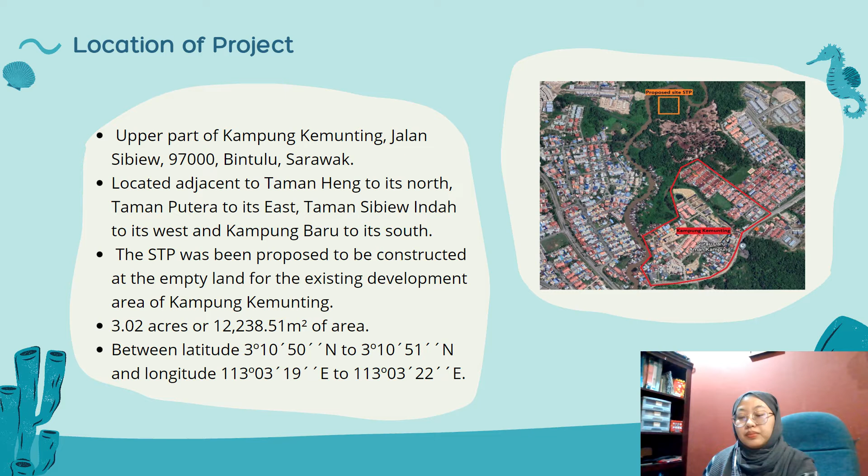The sewage treatment plant has been proposed to be constructed at the empty land of the existing development area of Kampung Kemunting. The STP will occupy 3.02 acres and 12,238.51 square meters of area. The project objectives are listed as shown.

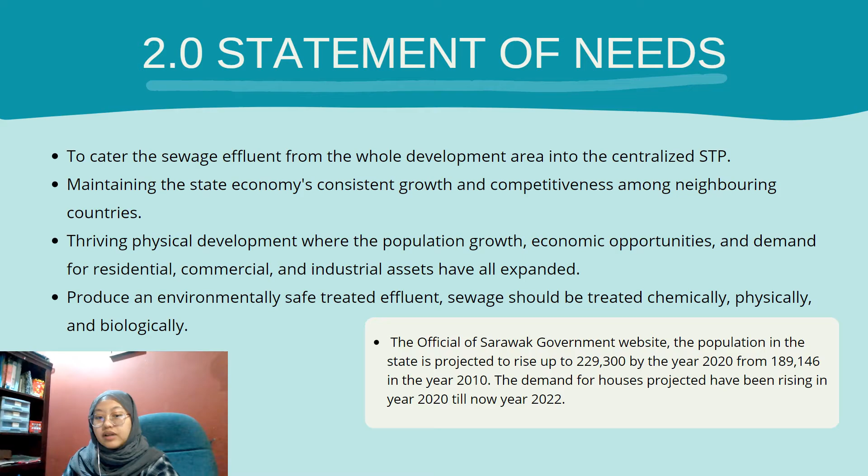As for the statement of need, Bintulu is experiencing rapid urbanization, which requires catering the sewage inflow from the whole development area into a centralized STP. Secondly, maintaining the state economy's consistent growth and competitiveness among neighboring countries. Thirdly, thriving physical development, where population growth, economic prosperity, and demand for residential, commercial, and industrial assets have all expanded. And the official Sarawak government website shows that the population of the state is projected to rise and keep expanding.

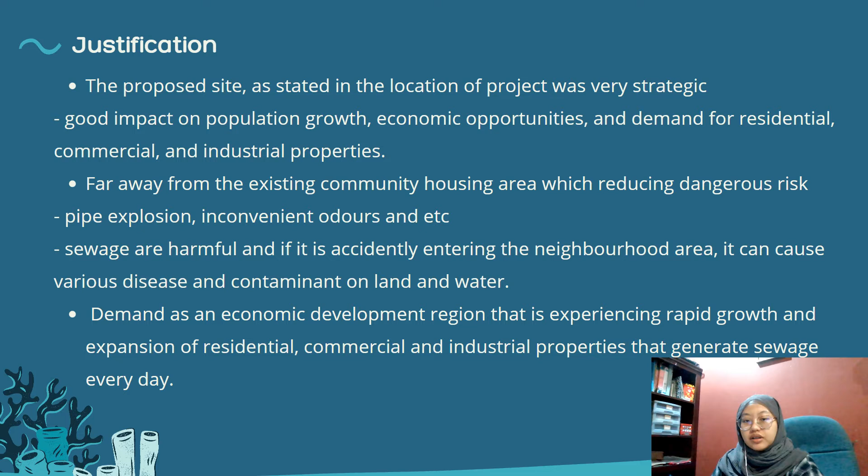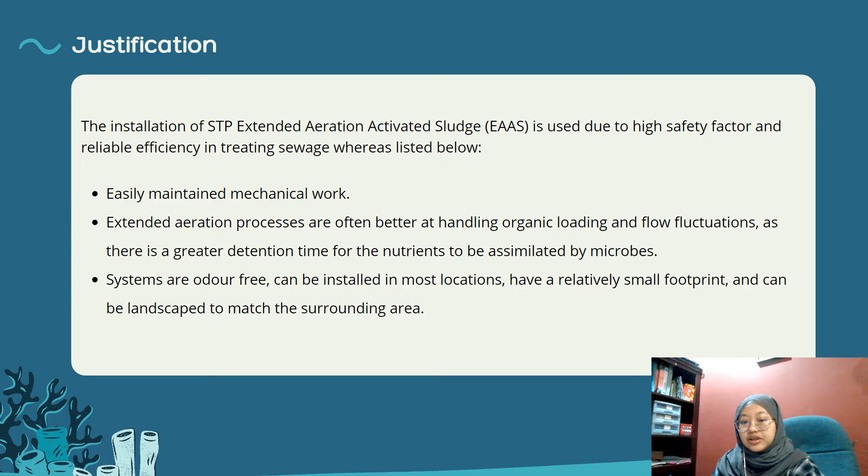Project justification. The proposed site location of the project is very strategic, with good impact on population growth, economic opportunity, and demand for residential, commercial, and industrial property. Secondly, reducing dangerous risks, for example, pipe explosion, odors, and etc. And lastly, demand as an economic development region every day. The proposed project will be using the technology of extended aeration activated sludge, the EAAS system, due to its high safety factor, reliability, and efficiency in treating sewage, as shown.

Assalamualaikum, my name is Afiq bin Amin. I will present site evaluation and project option. For project site, we choose Kampung Kemunting Development Bintulu Sarawak with population equivalent of 20,000 PE. The proposed site for the sewage treatment plant, STP, is determined to be suitable in location and topography. The location is near the river for easier discharge but far from the development area. Topography for the STP site is a bit hilly but solved through earthwork, cut and fill, to have suitable topography for better water flow.

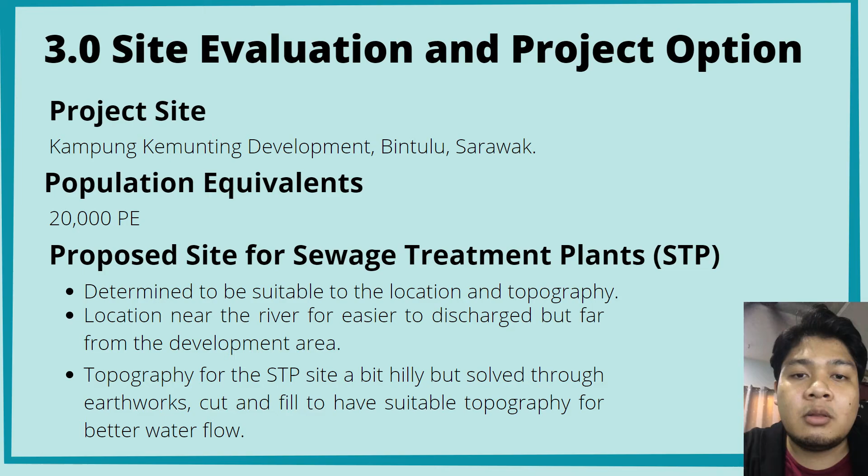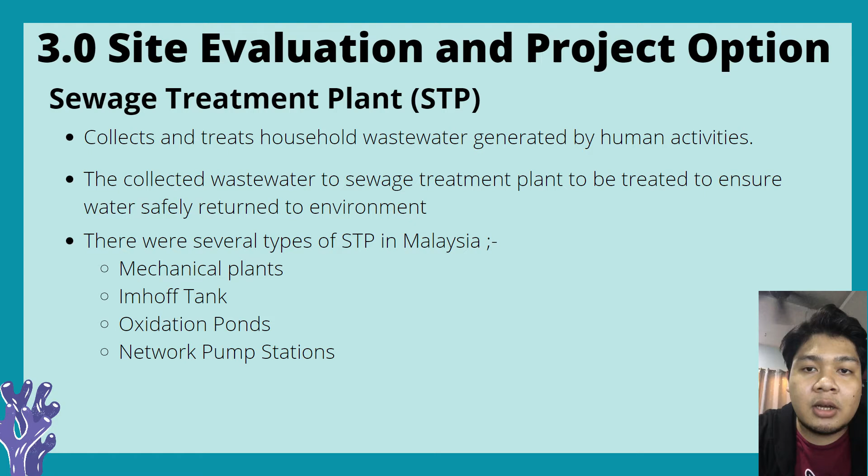A sewage treatment plant, STP, collects and treats household wastewater generated by human activities. The collected wastewater goes to the sewage treatment plant to be treated to ensure water is safely returned to the environment. There are several types of STP in Malaysia: mechanical plants, Imhoff tank, oxidation pond, and network pump station. In Malaysia, almost 38% of STPs are mechanical plants. These include extended aeration, oxidation ditch, rotating biological contactors, and sequencing batch reactors.

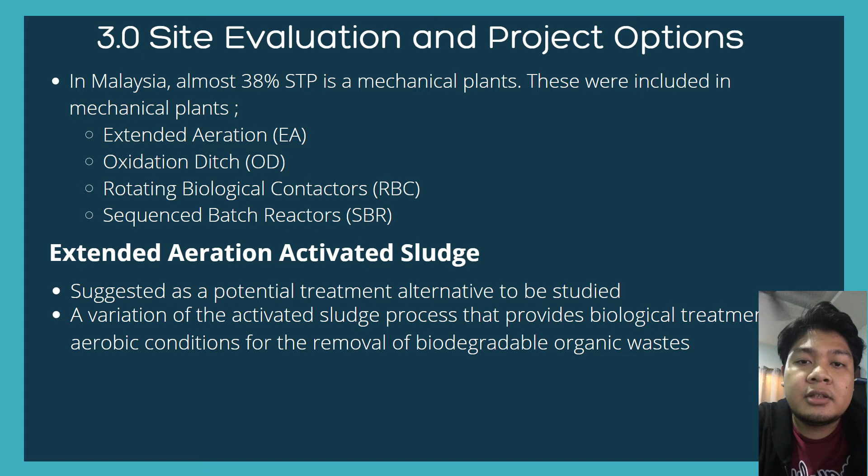We choose extended aeration activated sludge, suggested as a potential treatment alternative to be studied. It is a version of the activated sludge process that provides biological treatment under aerobic conditions for the removal of biodegradable organic waste. For project option, the chosen project site is at Kampung Kemunting Bintulu Sarawak with 20,000 PE. The proposed STP for this development area is extended aeration activated sludge, EAAS, more efficient in terms of sewage treatment efficacy, in terms of government standards, smaller footprint, and easier to operate.

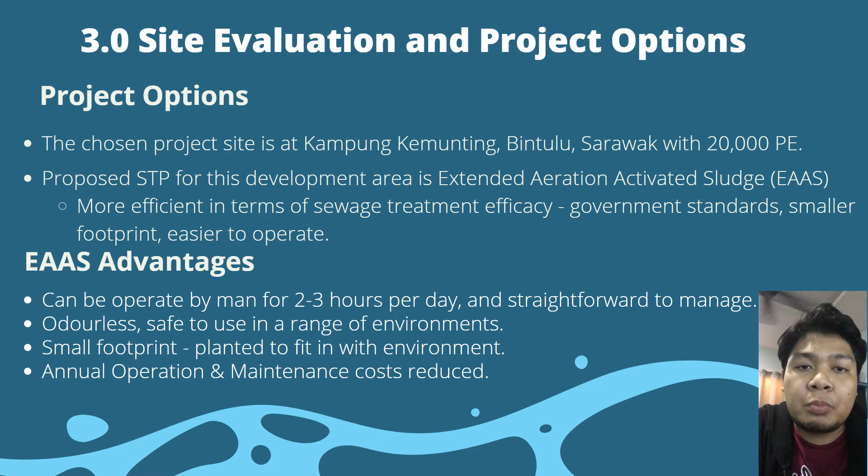Extended aeration activated sludge advantages: it can be operated by a man for 2 to 3 hours per day and is straightforward to manage, odorless, safe to use in a range of environments, has a small footprint, is planted to fit in with the environment, and annual operation and maintenance cost is reduced. Comparing extended aeration activated sludge, EAAS, to sequencing batch reactor, SBR: SBR takes more energy to complete the oxidation process in a short time. It is impossible to attain optimal conditions in the stipulated aeration and time cycle. There is a higher capital cost in installing sequencing batch reactors than extended aeration activated sludge.

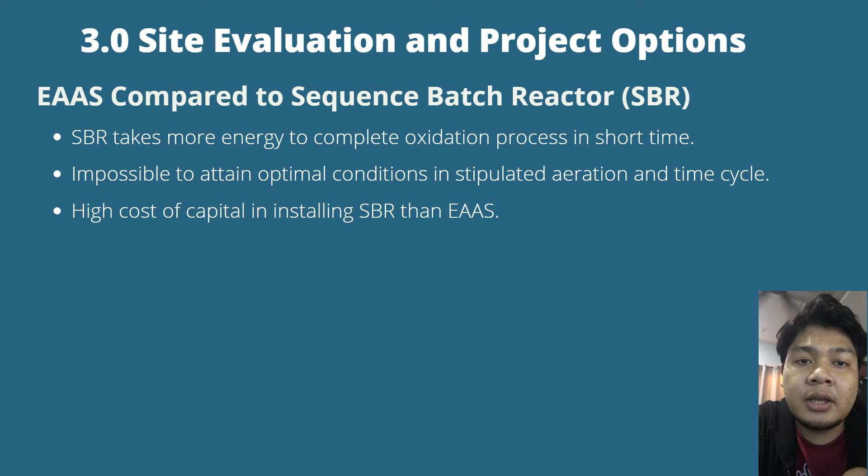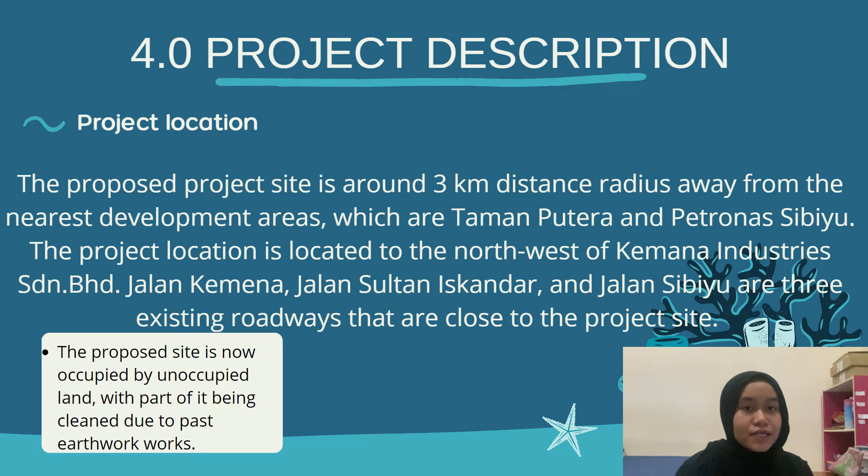Hi, I'm Dhiya, and I'm going to explain about project description. This proposed project site is located within a 3 km radius from the nearest development areas, which are Taman Putera and Petronas Sibiyu. This proposed site is unoccupied land, so there will be no problem for us to build an STP in that area. The provision of the STP complies with the following requirements set forth by the Department of Environment, DOE, and the National Water Services Commission, Suruhanjaya Perkhidmatan Air Negara.

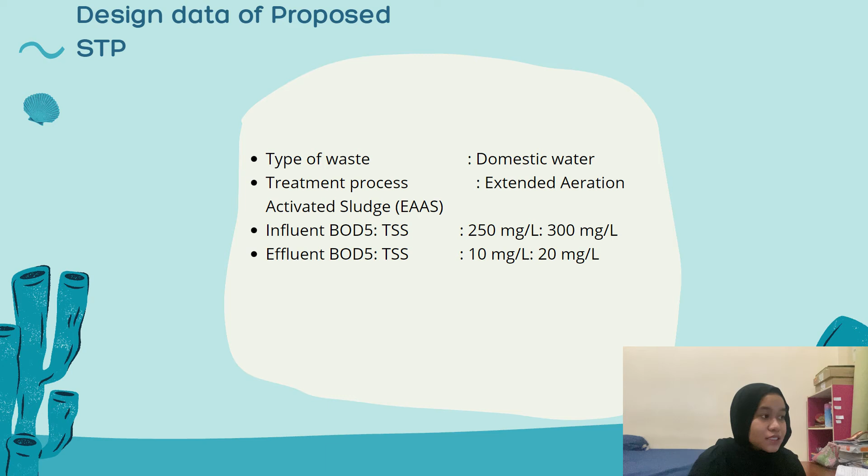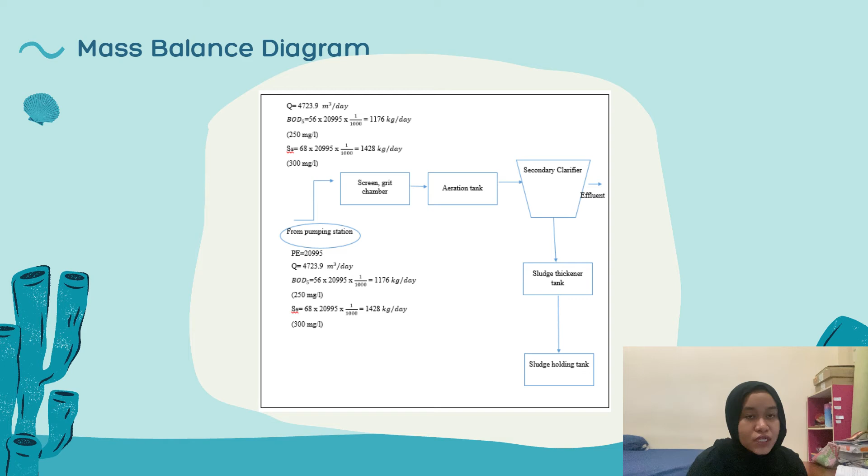And the next slide is the mass balance diagram. For this mass balance diagram, the PE has been calculated in the previous calculation, which is 20,995 PE. Q has been calculated by the formula Q equals ADWF, and both the biochemical oxygen demand and suspended solids have been given in the design table of influent values.

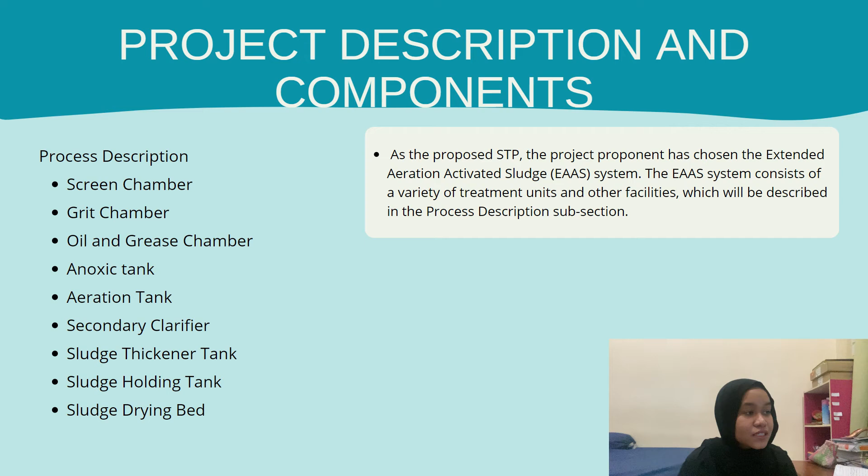First is the screen chamber, second the grit chamber, third the oil and grease chamber, fourth the anoxic tank, fifth the aeration tank, sixth the secondary clarifier, seventh the sludge thickener tank, eighth the sludge holding tank, and lastly the sludge drying bed.

Next is project activities. The project's implementation and operation will include a number of activities that have the potential to have negative environmental consequences. Project activities are divided into three major categories in order to assess all of the potential impacts. First is activities during the pre-construction stage or pre-development. This phase is the pre-construction stage, in which contractors or civil workers usually survey, make a site inspection, and do data collection.

Second, site clearing, earthwork and platform setting out, structural works, infrastructure works, transportation, internal access roads, disposal of construction waste, sewage, and base camp are under activities during the construction stage or development, which is the second stage.

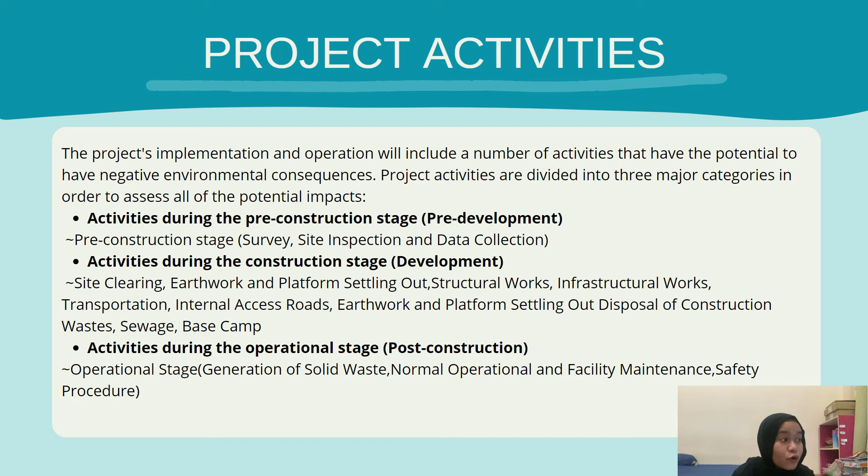And the third or last stage is activities during the operational stage or post-construction. The operational stage includes generation of solid waste, normal operation and facility maintenance, and safety procedures.

Last but not least, since the proposed project is expected to run indefinitely, project abandonment during the construction phase is unlikely in the future. However, if the economy suffers a significant downturn, development and construction will cease, as would labor force reductions. Therefore, the proposed project is expected to take around 12 months to complete.

Regarding their socio-economy, the local population can be categorized as middle income. With the presence of government administrative buildings and other development, the source of income comes mainly from commercial development, the government sector, and the fishing industry.

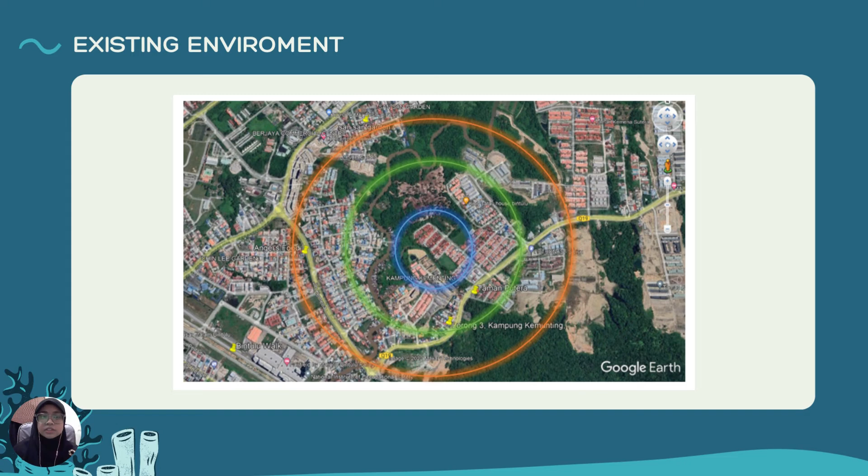Bintulu is located in East Malaysia. Generally, all states in Malaysia are under the influence of the Asian monsoon system. For this reason, the region is believed to experience an equatorial type of climate. This is proven by the figure showing data on temperature, rainfall, wind speed, pressure, cloud, humidity, and sun hours in Bintulu.

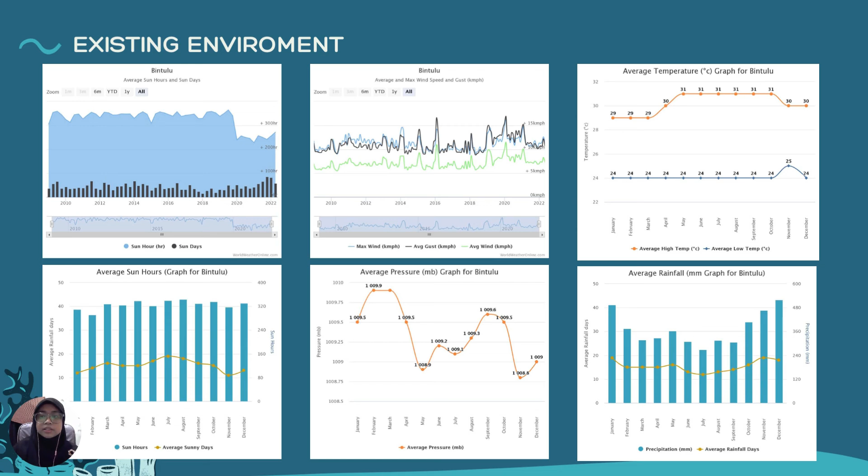Environmental impact assessment is made by analyzing all project components in relation to the environmental parameters of the project area. In this project, there are a few aspects that will be considered regarding their impact during the construction or operational phase. For this part, I will pick 3 of the major impacts expected on this project.

The first impact that we should consider is soil erosion and sedimentation. Soil erosion has worsened human civilization and man's quest for a better life. In fact, soil erosion is likely to occur during the construction stage of the proposed STP. According to Sakinatu's research in 2017, this phenomenon can be triggered as a result of earthwork construction.

Lastly, noise. During the construction phase, the level of noise at the site is high as construction involves a lot of equipment and machinery. Therefore, the noise level in that area is higher than usual, which might lead to noise pollution, especially at sites with a residential area nearby. Hence, the proposed STP could lead to various impacts. All this depends on how we manage and handle the project.

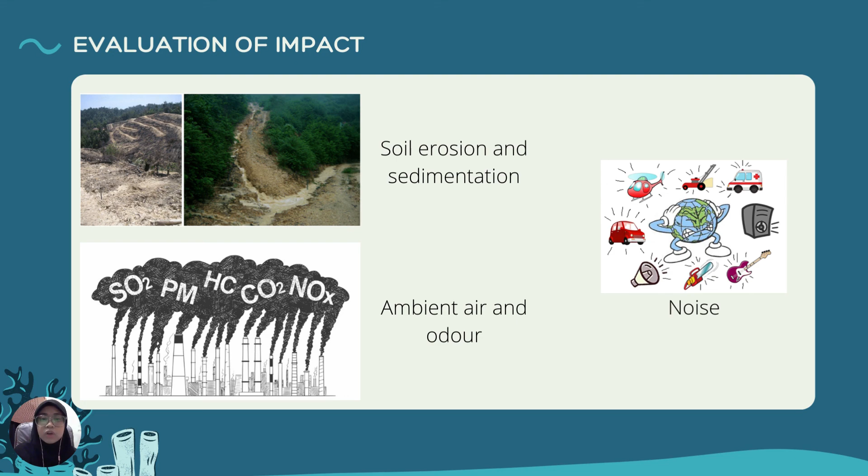My name is Christie and I will be presenting mitigation measures. One of the impacts from this STP construction is earthwork and construction work. As a mitigation measure, rainwater that runs off the exposed surfaces of the plant will be properly directed into the nearby drainage system to avoid soil erosion.

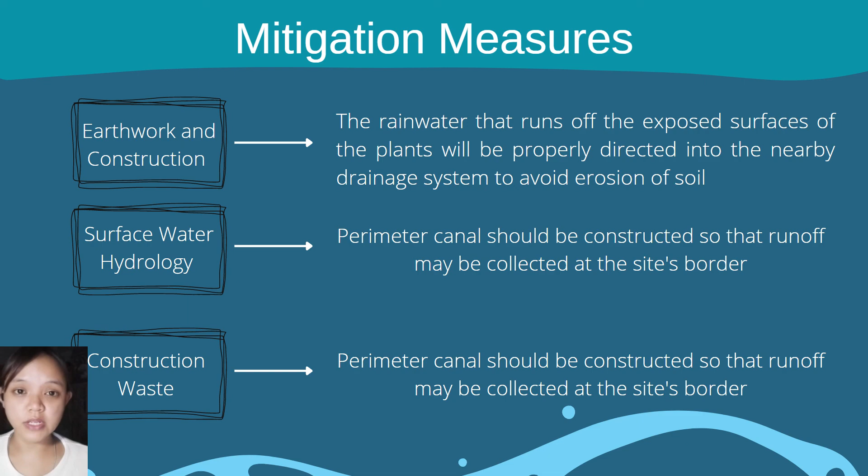Next, impact on surface hydrology. The perimeter canal should be constructed so that runoff may be collected at the site's border. Lastly, construction waste. Waste material that cannot be reused must be disposed of at a location that has been designated as a dump site.

In conclusion, the objectives of this proposed project have been achieved. Kampung Kemunting Bintulu clearly needed a sewage treatment plant. The technology chosen is the Extended Aeration Activated Sludge, EAAS, system. This system has a high safety factor and is an efficient sewage treatment plant. The impacts and mitigation measures have also been determined to reduce unwanted pollution.